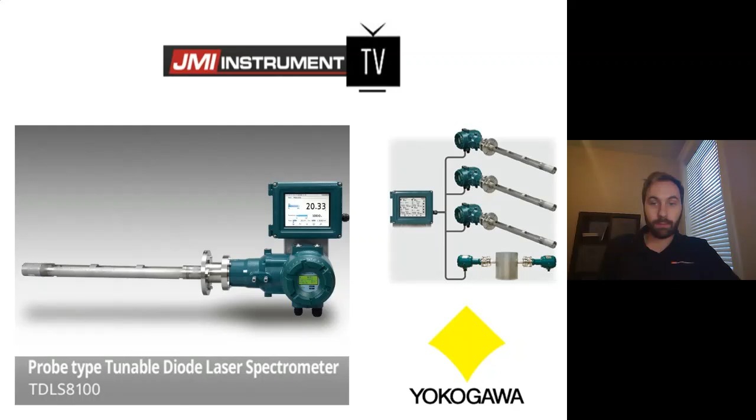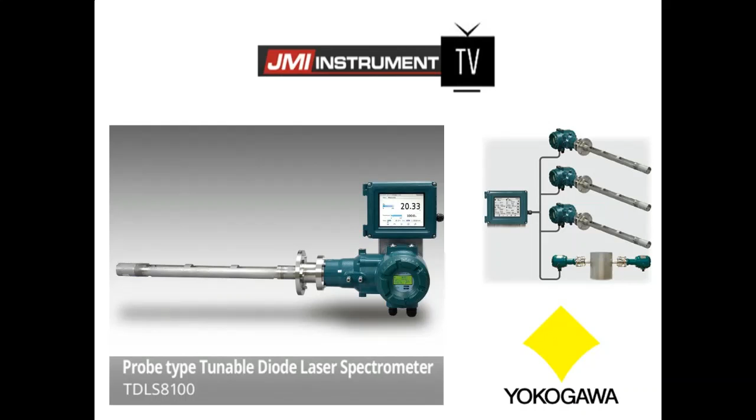What Andrew is referring to is actually, you can see the two different styles of TDLS analyzers. You can see the probe style, 3 of them. And on the bottom, you can actually see the actual TDLS8000, which has basically a laser located on one side and the receiver on the other side. So today we're going to do kind of a speed presentation here on the TDLS8100 and some of its advantages, and then we'll take questions afterwards.

What is it? The TDLS8100 is basically a probe style analyzer. It mounts on a flange. That flange can be 2-inch, 3-inch, or 4-inch. That doesn't really matter too much. The length of the probe actually comes in either a 0.7 meter, 1 meter, or 2 meter probe.

The whole purpose of it is to make a measurement of some very specific analytes, specifically the oxygen molecule, the CO molecule, the ammonia molecule, or the HCl molecule. It's relatively limited compared to our TDLS8000, which has a number of other measurements that we can do with it. In the case of this analyzer, it can measure one analyte at a time, with the exception of the CO and methane laser.

The whole purpose of this measurement is to make a measurement in situ, inside the process. We're going to use the fact that different molecules will absorb a laser's energy at different frequencies. It basically gives you an analysis that is free from interferences. That's one of the key benefits of this analyzer, is interference-free measurements.

As Andrew alluded to, instead of having 2 flanges to mount, we only have to mount 1. There's a couple of caveats we have to watch, and we'll hit on those here in a minute.

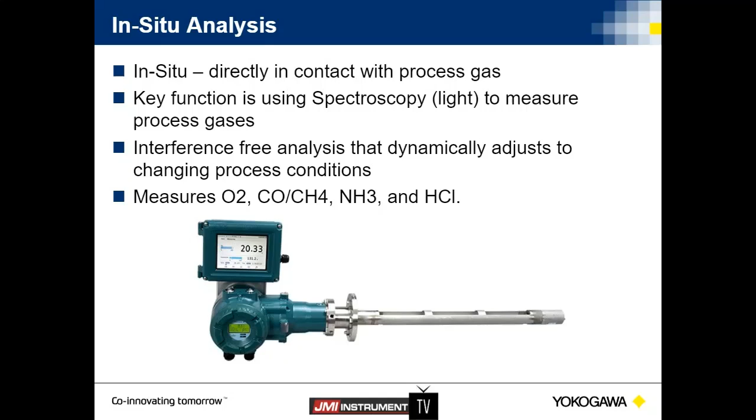Give you a range of frequencies. Oxygen absorbs at approximately 760 nanometers, whereas the CO molecule absorbs at approximately 2200 nanometers. Big difference there. We do not tune from 760 nanometers all the way to 2200 nanometers. Rather, it is very small tuning that's done right around those specific frequencies.

Here's some of the caveats. It's a beautiful fact: if we only have to mount one flange, that means we only have to have access via manways onto one side of a process. So if I'm mounting this analyzer onto a stack or a duct, I only need access on one side, and that's really helpful. But there are some limitations, and the main one you're going to see is the process maximum temperature.

The process maximum temperature is 1,112 degrees Fahrenheit. So I'm not going to be able to put this in a process heater application where I measure across the radiant or the radiant to the convection section of a process heater, where the temperature might be as high as 2,500 degrees Fahrenheit. In that case, I have to fall back onto my TDLS 8000.

You can see it can handle some significant pressures. The reality is the measurement is actually occurring across a window that you see here. What happens is a laser is placed down in this area right here. It fires through a window down to what's referred to as a reflector. Fancy term, you guys, for it's a mirror.

You notice the process flow. The process flow basically comes this direction against the rounded side of the probe. As it flows, it basically dumps whatever gas is to the inside and constantly refreshes it and pushes it out. On the face of the analyzer, you have a small display that tells you what the process variable is. The transmission tells you if you have any alarms associated with it.

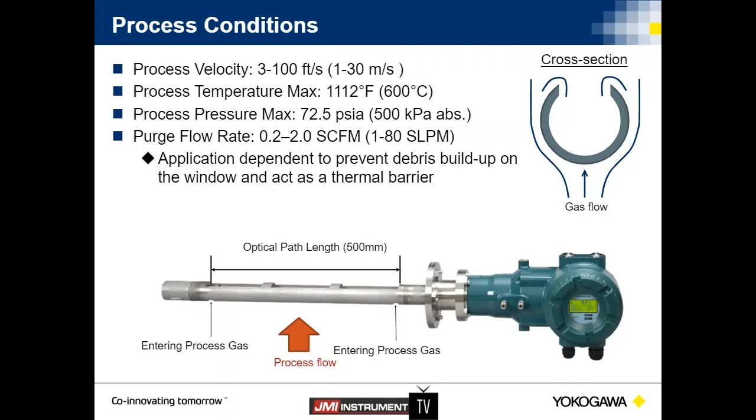There's my fancy mirror, you guys, called a retroreflector. The beauty of this is it mounts onto the probe. When you receive a TDLS 8100, it's already aligned. When you receive a TDLS 8000, alignment of the two installed flanges, the opposing flanges, is critical.

In that process of making certain that the mounting is adequate to support the analyzer on both sides, it kind of goes away here. Basically, we still have to support weight, but we don't have to do an alignment of two different devices.

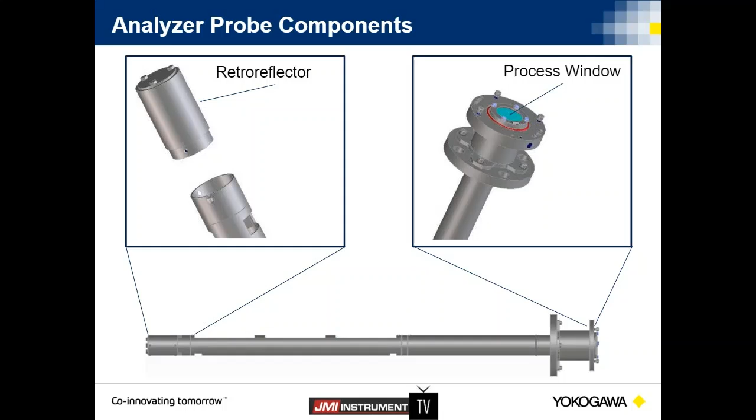There is a process window that the laser fires through. It's replaceable with 4 screws that basically are retentive screws. It's set up on a modular design, just like our TDLS 8000. Everything comes apart, it's replaceable as modules. A laser module can be ordered from our plant and replaced, and it's already calibrated, so it's pre-calibrated.

As you can see, depending on if we're in a Class 1 Div 1 area or Class 1 Div 2, there may be an extra window associated with this analyzer. And by the way, the analyzer is only available as a general purpose analyzer or a Class 1 Div 1 analyzer.

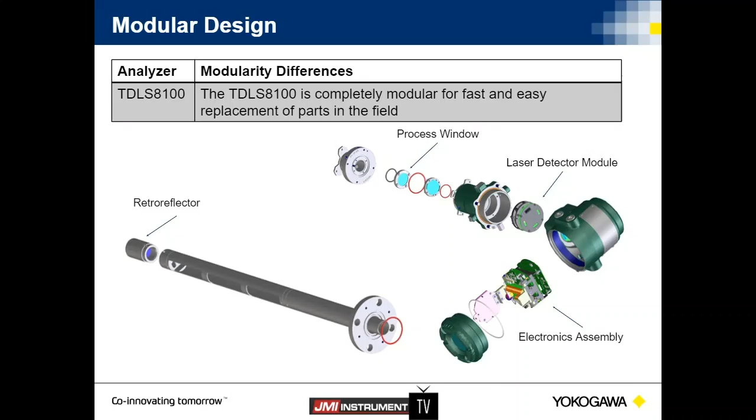The operator interface is a very, very friendly operator interface that can display and handle up to 4 TDLS 8100 analyzers. So you can set it up in different quadrants and look at those analyzers. You can configure all 4 of those analyzers from this operator interface. And that's all it really is.

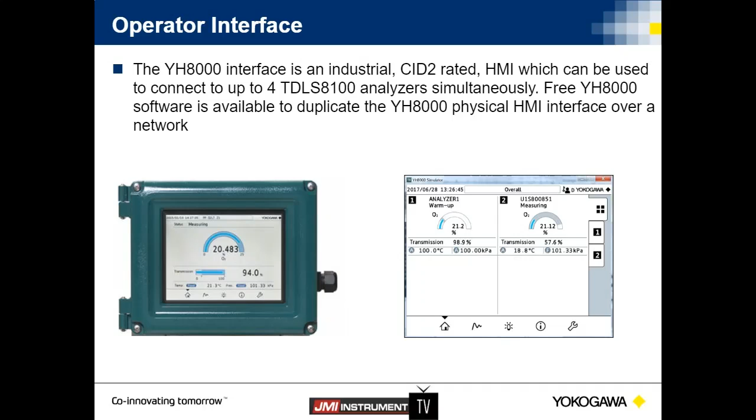Typically, the operator interface will be placed down at grade. And then we communicate from the analyzer to the TDLS 8100 via an Ethernet network. You get a lot of good information back on that operator interface. And, by the way, there is also an operator interface software package that emulates this exact HMI, and that is available on our website and is actually a free download.

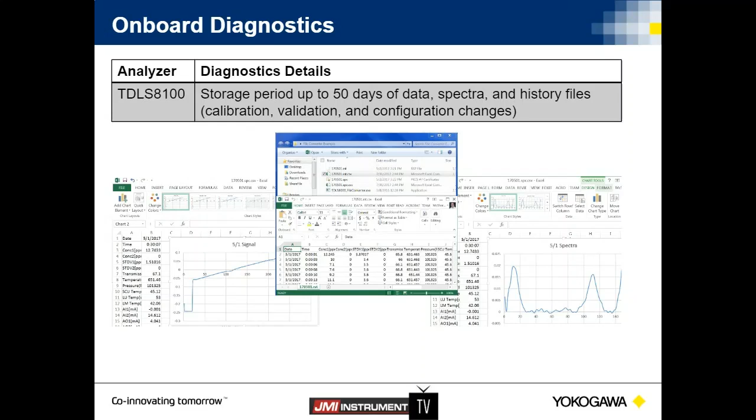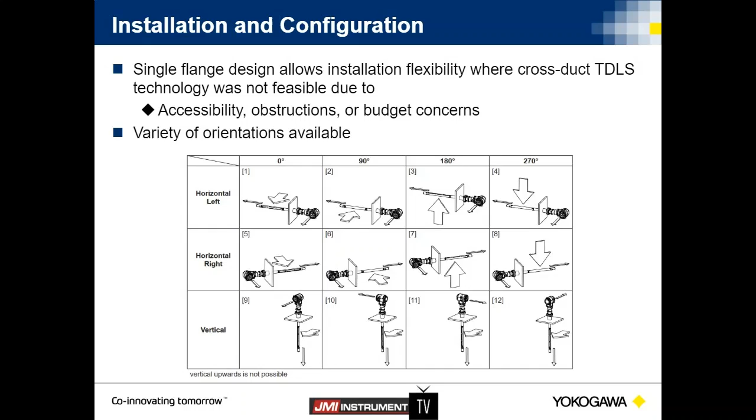Different lengths: the probe comes in either 0.7, 1, 1.5, or 2 meter probes. The optical path length, in reality, is this distance from here to here, which is 500 millimeters, basically 1 meter—that's our optical path length. If I have a 2-meter probe, all we do is push that optical path length further out into the process. In other words, we don't get a longer optical path length by buying a 2-meter probe, we just get it further into the process. So depending on the duct size, the heater size, or the stack size, we would choose these different length probes.

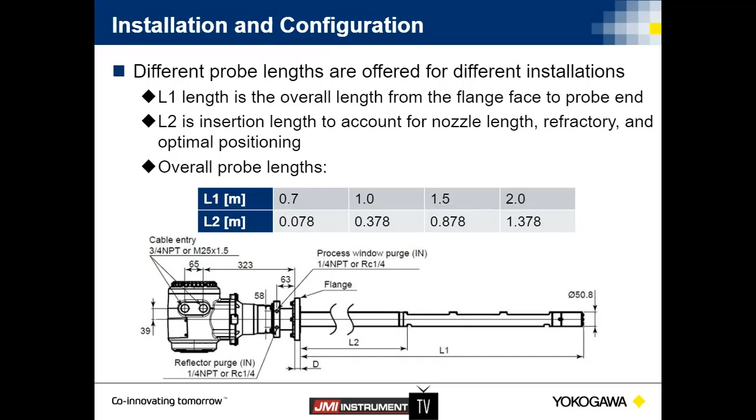Purging. There's also going to be purging associated with the TDLS8100, as we do with the TDLS8000. The preferred purge gas is always going to be nitrogen if I'm doing an oxygen measurement. If I'm doing a CO measurement or an ammonia measurement or CH4 measurement, we could use instrument air, clean, dry instrument air.

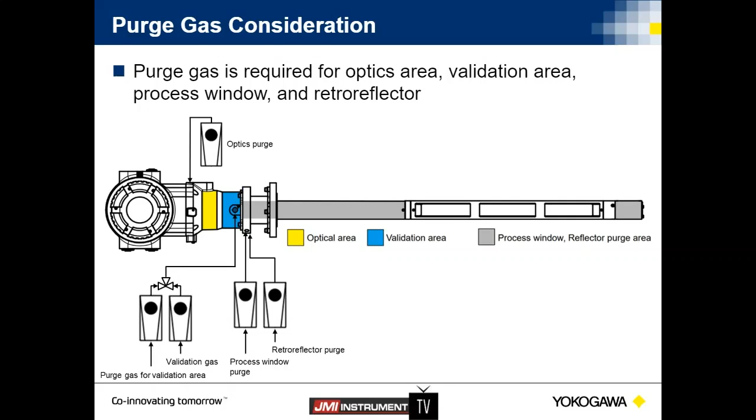The utility panel. Whenever one looks at a utility panel, this is set up to support an analyzer, 2 in this case. This is what's referred to as a dual utility panel, so it will have 2 sub-panels. And none of this is rocket science, you guys. You can actually build these panels up yourself. But the important thing with purchasing them from Yokogawa, from JMI, is that it's pre-packaged. It's plug and play compatible. You don't have to issue a bunch of purchase orders to get a bunch of parts.

So the purpose of the utility panel is, number 1, provide purges. Number 2, provide the power for the analyzer. The analyzer is powered by a 24-volt DC power supply. It's a 5-amp circuit. No, it is not loop powered. So each analyzer will have a power supply in it, as well as a power supply for the HMI and the Ethernet switch.

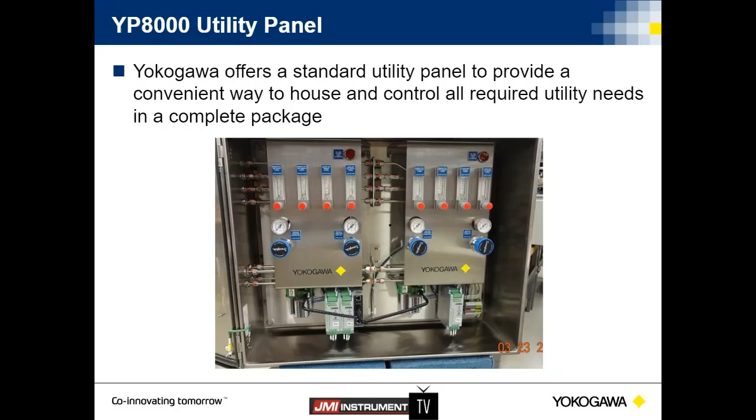Quoting: whenever we look at a TDLS 8100 or an 8000, there's always going to be a data sheet that we're going to ask you to complete. That data sheet goes into some pretty good detail about how the probe's going to get installed. But the critical ones are always going to be: what is the stream composition? What are the physical parameters that we're going to put the actual analyzer on? We need to know the stream composition to make sure that we choose the correct peak.

Now, I didn't go into a lot of the math or the detail about what that peak is, but when we look at the peak, we're looking at a peak of oxygen around 760 nanometers. We want to make sure there's no interferences. And I'll say I don't do that. I actually have one of my application engineers look at that. We let them look at your application sheet and say, number 1, can we do the application?

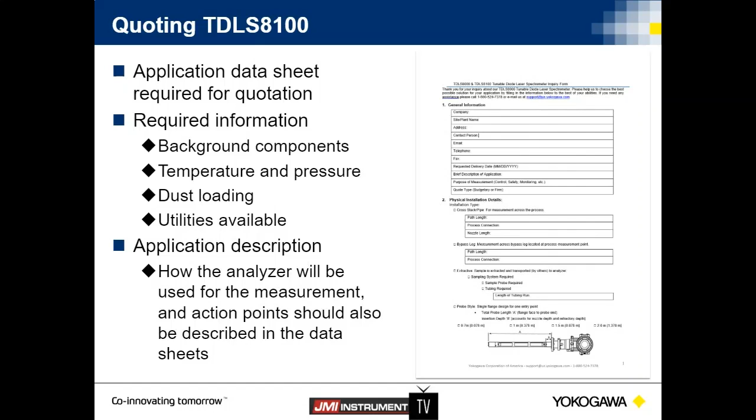In the case of the 8100, is the temperature below 1,112 degrees? Is the pressure below? Are there any interfering gases associated with it? What is the dust load? One of the critical ones I need is, if it's in a dusty environment, I need an indication of the particulate load in grams per meter cubed. The reason is that tells me how far I can throw the laser without blocking it totally. So that's one of the key critical ones.

Applications. We see both the TDLS 8100 and the 8000 used in multiple different applications on boilers, process heater stacks. We see them used in thermal oxidizers. We see them a lot in limiting oxygen concentration, in other words, looking at a vent header to make sure there's no oxygen present in a vent. We look at vapor recovery units. We've done it in vinyl chloride monomer. So there's a number of different applications that we can use this analyzer on. The probe style is specifically well suited for stack applications or duct applications, or even a vapor space above a tank type application.

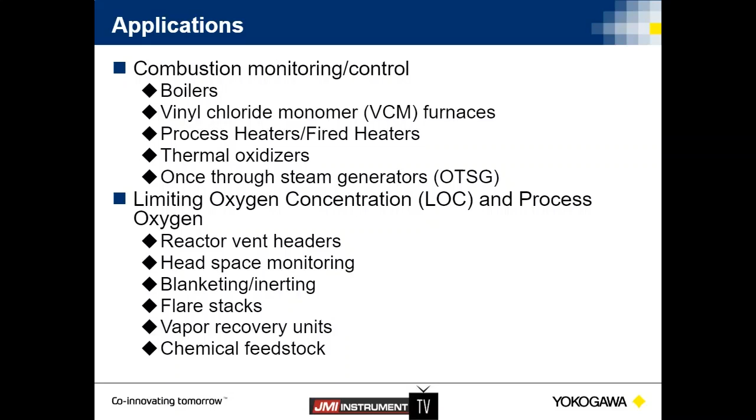Key points. Just wrapping it up quickly, and we'll move on to any questions anyone has. It's a single flange design. I only need one process flange. It comes to you pre-aligned. I don't have to go through an alignment of two different flanges, or a laser unit and what we call a sensor control unit. It's making the measurement in situ. I'm not removing the gas from the process. It reduces time and costs associated with consumables and routine maintenance. It's interference free. Oh, and by the way, it's SIL 2 rated straight out of the box with a single analyzer. Very important for safety shutdown systems.

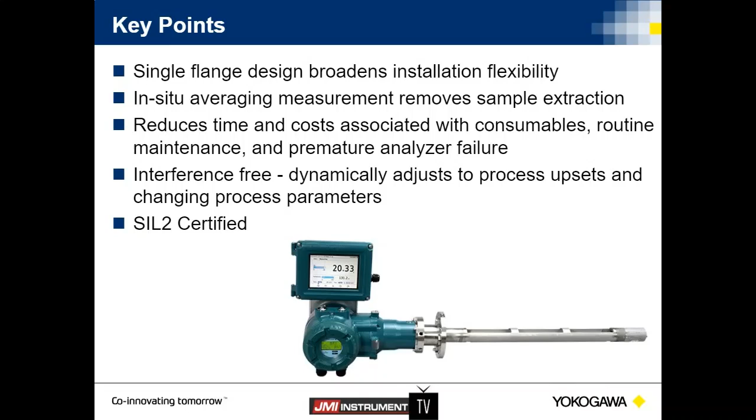That, everyone, concludes this portion of my presentation. I welcome any questions anyone would have.